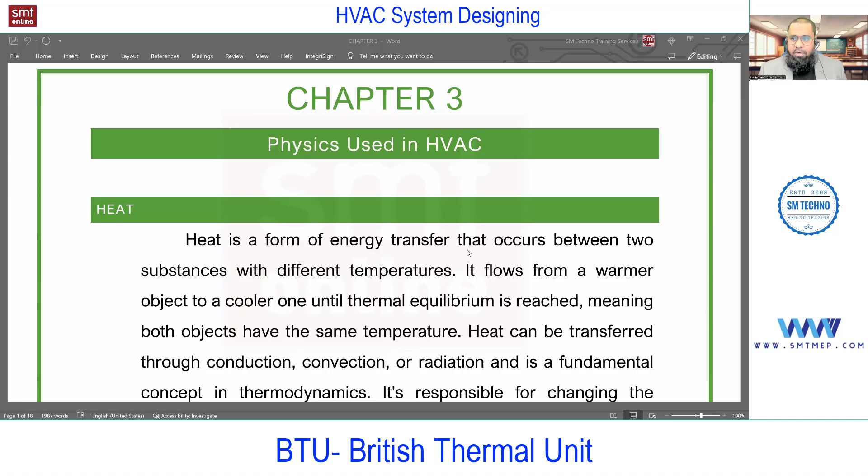So let me proceed. The first term you find here is heat. In air conditioning we are adding or removing heat to maintain the required temperature for summer or winter. So first of all, you must know what heat is. As an engineer, I believe you already know, but my responsibility is to explain this quickly, because this course goes from basic to advanced level. In this session, we'll try to understand these terms from an application point of view, not just theoretically. Only then can you get involved in design, because the concept is very important.

So here on screen, heat is what? In short, heat is a form of energy. And are temperature and heat the same or different? Different. Heat is a form of energy and temperature is the intensity of that energy. With temperature, we can find out the rate of heat transfer, but the content of that energy is heat. In technical terms we can also call heat enthalpy, the heat content of the body. So what exactly is heat? You can find it here on screen.

Heat is a form of energy transfer that occurs between substances with different temperatures. Whenever there is a temperature difference, only then will heat transfer. If the temperature is the same in both bodies and they are physically connected, they attain thermal equilibrium and will not transfer heat. If there is no temperature difference, there will be no heat transfer.

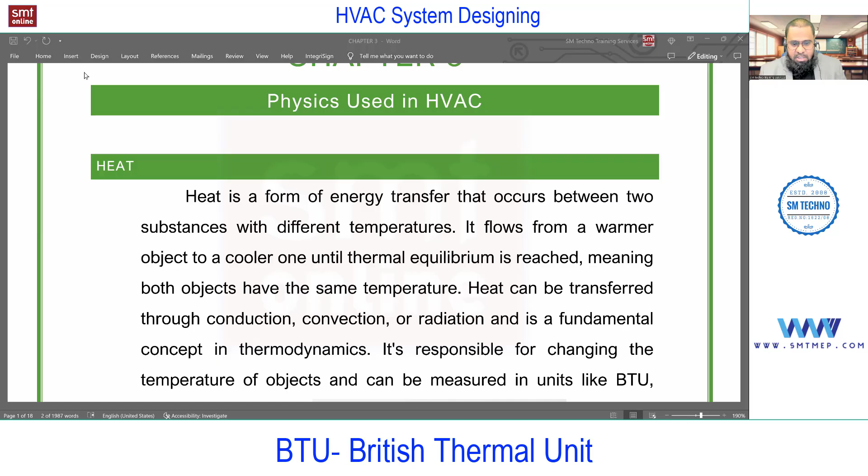We'll also use this at the time of load calculation, especially heat gain through partitions, floors and ceilings, because heat gain through a partition means between two rooms. If the two rooms are at the same temperature, there will be no heat transfer. I'm trying to relate these terms to load calculation so they will be helpful later. Next, heat can be transferred through conduction, convection and radiation. I believe you know what conduction, convection and radiation are.

Even electrical engineers also know these basics. But still, if you have confusion, don't worry. We have a topic in the next page only about conduction, convection, and radiation. So the heat can be transferred with the different modes. This we can call the different modes of heat transfer. It can be conduction, convection, or radiation.

And it's a fundamental concept in thermodynamics. And you know what is thermodynamics? It's responsible for changing the temperature of an object and can be measured in units like BTU. So as an engineer, you know calorie, joules, kilojoules, etc., what you learn in engineering. But this term BTU may be new for many who are new to this field. Those who are already in the field know this term is very commonly used in actual practice.

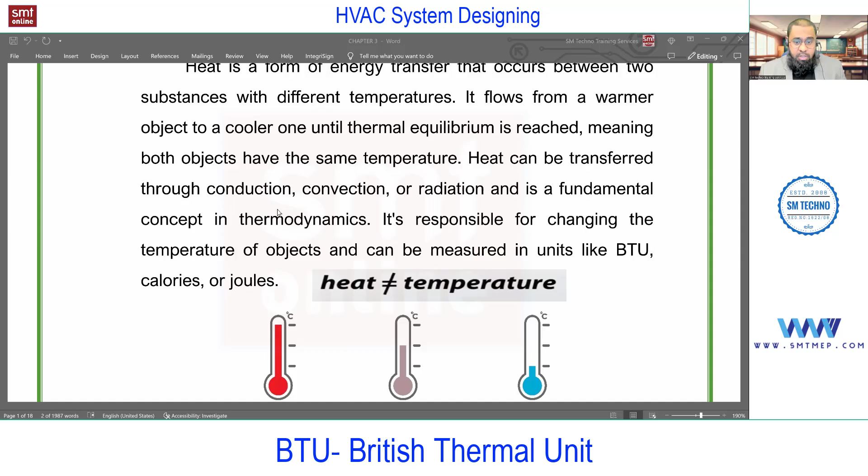BTU is what? In short, we call it BTU. It's a British thermal unit, right? So what is BTU and how to understand this, that also we'll discuss. Let me proceed. So you see, heat always transfers from high temperature to low temperature. According to which law or which thermodynamic law? First law of thermodynamics? Any more? Okay, it's according to the second law.

We have these laws of thermodynamics also, first and second law. In this chapter 3 only, we'll discuss them before dealing with the vapor compression cycle, because these basics are very, very important. So try to understand the applications out of this. This heat transfer from high temperature to low temperature is applicable when learning the vapor compression cycle, because in the vapor compression cycle, you'll find a condenser and evaporator. In the condenser, heat will reject, and in the evaporator, heat will extract.

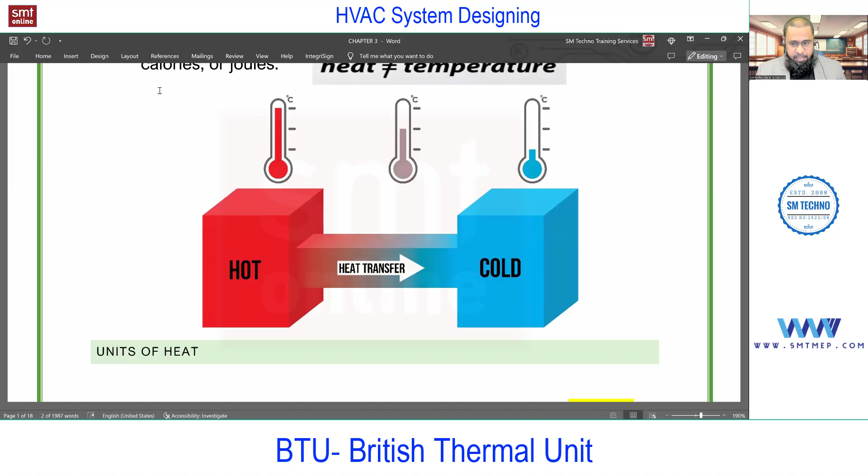And this is because of the nature of the heat only. So by nature, heat will always flow from high temperature to low temperature, right? Everyone is aware of this. We'll discuss more about this in the second law of thermodynamics in chapter 3 only. Next, as I said, the unit of heat is commonly BTU in actual practice. It can be joules, it can be calories, but actual practice means, for load calculation point of view, we're using this term BTU.

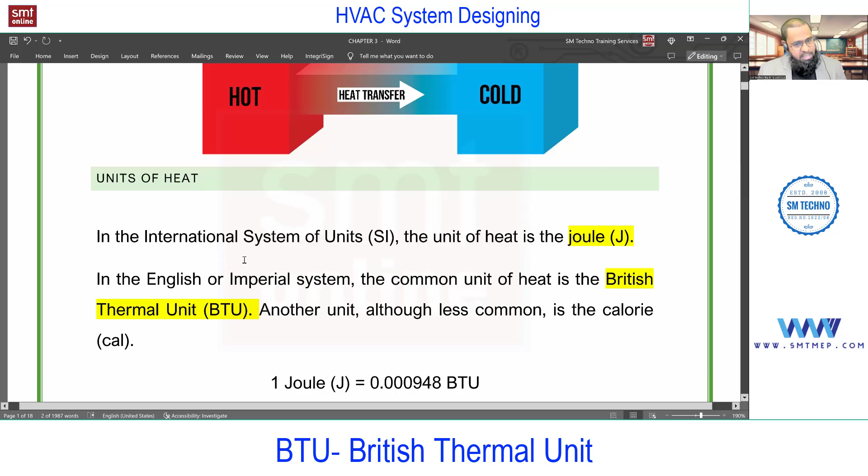So if you talk about the units of measurement, SI units or English, also known as imperial. Commonly, we are using these two measurement systems in actual practice: SI, and metric is a part of SI, and English or imperial. This BTU is a unit belonging to the English system, and in SI we can use joules. So what exactly is BTU? We'll try to understand, because at the time of load calculation, when we extract the heat gain through all the possible sources, the end result is going to be in BTU per hour.

So we must know how much BTU per hour is adding for a particular space. Only then can we select the required capacity cooling unit. Or in case of heating also, we must know at what rate the heat is rejecting from the space. Again, that we calculate in terms of BTU if we are dealing with the English system. So what exactly is BTU? In case of conversion, 1 joule equals 0.000948 BTU, or 1 BTU in terms of joules is 1055.06 joules.

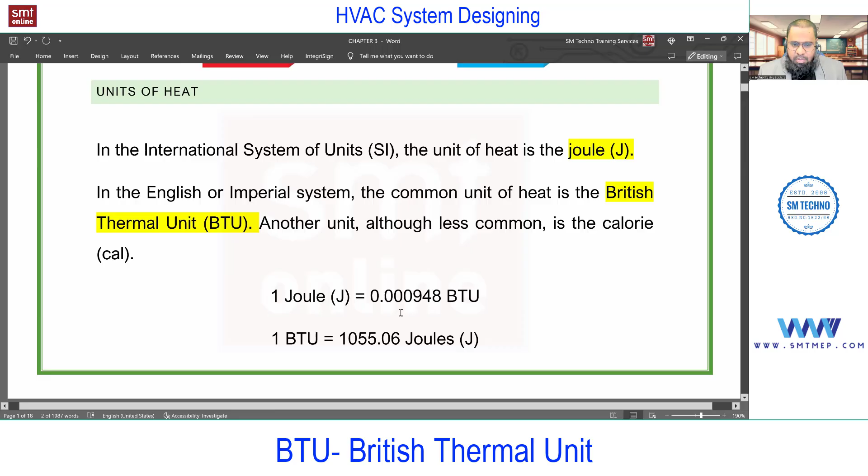These are the values, but what exactly is BTU? That we'll try to understand now. Even calories will be used, which is also a part of English, not commonly, but most commonly in the English system you'll find BTU. So 1 calorie in terms of joules is also given in the conversion. The conversions you need to memorize, which we'll use in load calculation. And we have a separate topic for conversions also in this chapter 3.

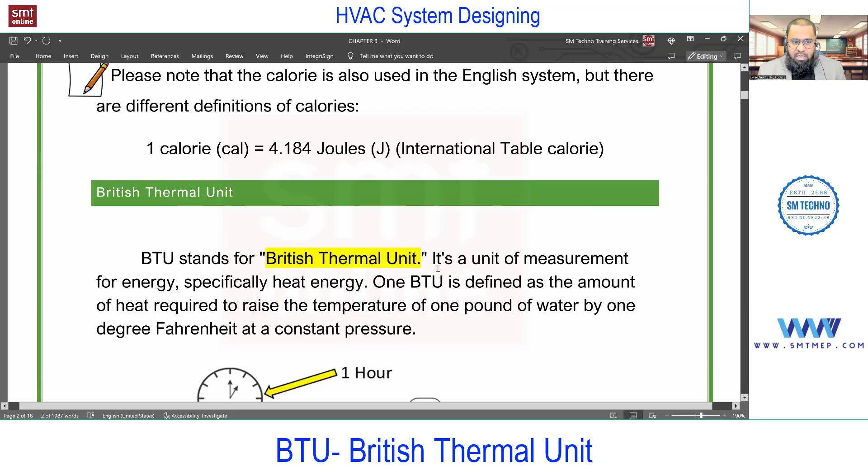Next, we'll try to understand what BTU is, and it can be asked in interviews also. Very basic interview question. And even for load calculation also, as I said. So you see, BTU stands for British thermal unit. It's a unit of energy, nothing but heat energy. And 1 BTU is defined as, this is important.

You see, 1 BTU is defined as the amount of heat required to raise the temperature of 1 pound of water by 1 degree Fahrenheit at constant pressure. Once again, 1 BTU is defined as the amount of heat required to raise the temperature of 1 pound of water by 1 degree Fahrenheit at constant pressure.

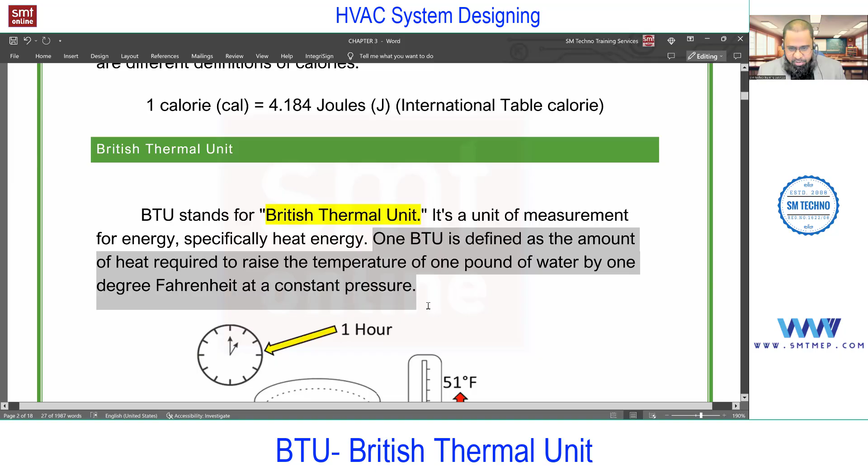So what do you think? Is BTU a large amount of heat or a limited amount? You see, 1 kg in terms of pounds is what? 2.2 pounds. So I can say half a liter of water is about 1 pound. And to increase by 1 degree Fahrenheit, Fahrenheit again is a unit of temperature in the English system. In SI, we use degree centigrade.

So what is degree centigrade or Fahrenheit? That also you'll find in the same chapter. But as an engineer, you know these terms, Fahrenheit, centigrade, Kelvin, etc. So what do you think? Is 1 BTU a large amount of heat or just limited? Limited. Yeah, because 1 BTU is the heat energy required to increase 1 pound of water by 1 degree Fahrenheit. So it's a very limited amount of heat energy at constant pressure.

So here, this example will help you. This is very simple. 1 pound of water in this container, initial temperature say 50 degree Fahrenheit. Then I'm going to add heat, say 1 BTU. When you add 1 BTU of heat energy to this container holding 1 pound of water, the temperature will increase from 50 to 51 degree Fahrenheit. So 1 BTU of heat energy is responsible to increase 1 pound of water by 1 degree Fahrenheit.

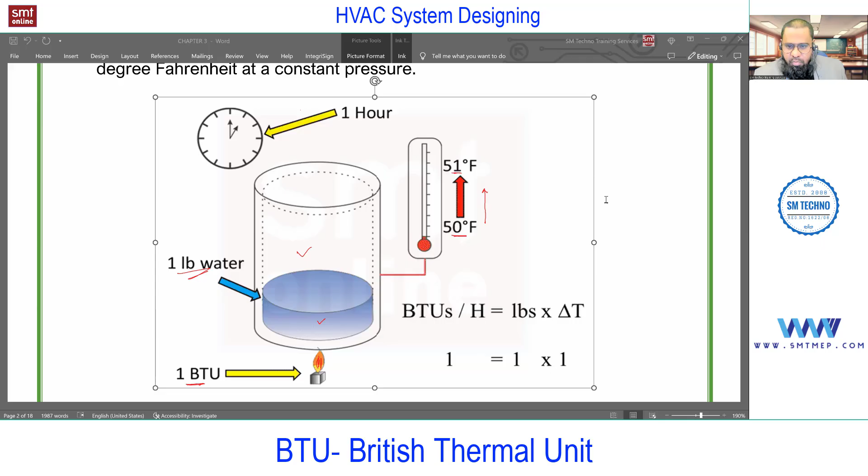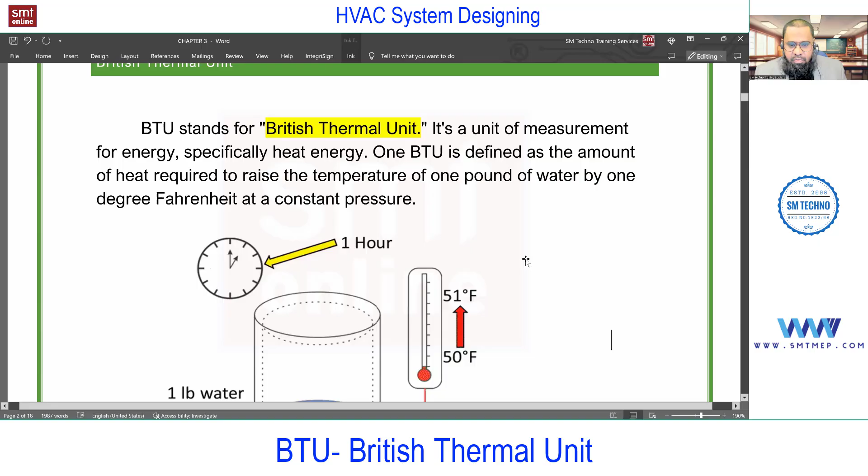It's very basic and important from an interview point of view, so you must memorize this definition: 1 BTU is the amount of heat energy required to raise the temperature of 1 pound of water by 1 degree Fahrenheit at constant pressure. Next, we'll deal with one simple example. You know that to increase 1 pound of water by 1 degree Fahrenheit, 1 BTU is required.

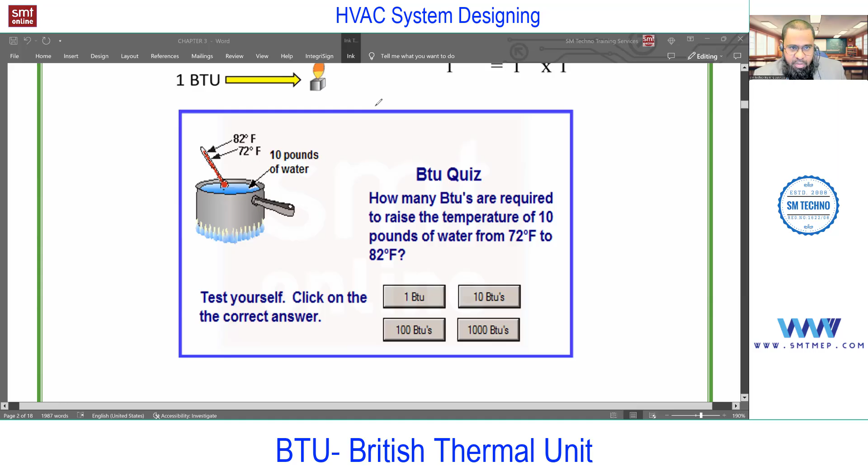In this example, the initial temperature of water is 72 degree Fahrenheit. I want to increase this to 82 degree Fahrenheit. So how much do I want to increase? 10 degree Fahrenheit, because the difference between 72 and 82 is 10. For what? For 10 pounds of water. So how many BTUs of heat energy are required? We have 4 options: 1, 10, 100 or 1000. Yes, online, I got the answer 100. What about other participants? 100. So 100 is correct.

Why? Because the mass is 10 pounds, and the degree change is also 10. So 10 into 10 is 100 BTUs required. If I consider 1 pound, then 10 would be the correct answer. But here the content is 10 pounds, so that's the reason 100 BTUs are required. Very simple, but try to understand the concept, because this will be used at the time of load calculation.

At the time of load calculation, when we deal with heat gain through wall, partition, floor, ceiling, ventilation, etc., we calculate it in terms of BTU per hour. So you can understand that 1000, 2000, 3000, 5000 BTUs per hour of heat is entering from outside to inside through this wall or this glass, etc. That's the reason this basic is very important. Hope you got the idea about BTU, British Thermal Unit.